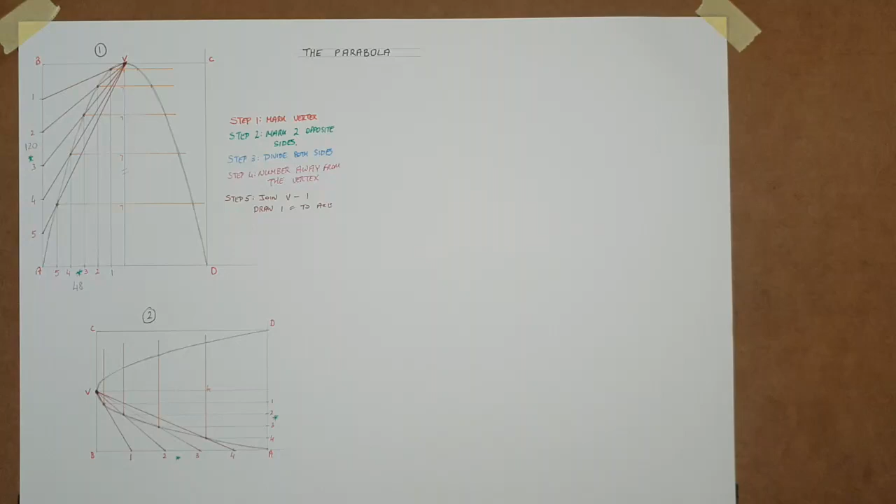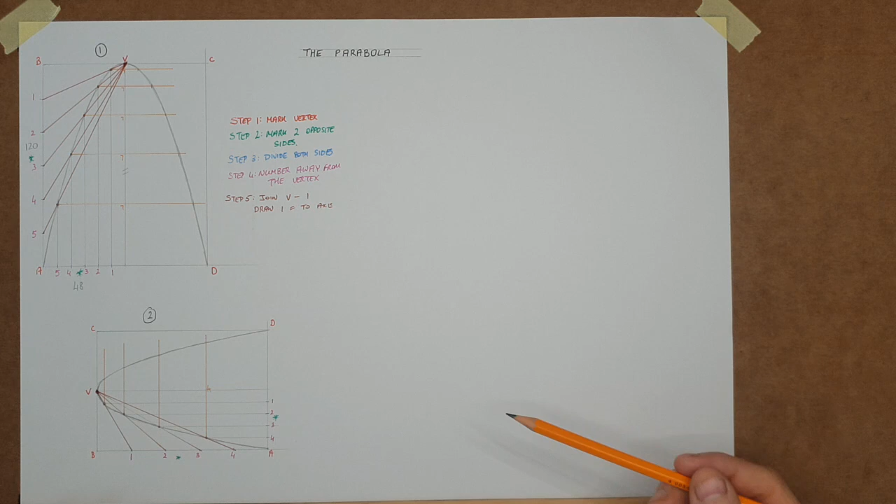Hi everyone, in this video we're just going to take the parabola on to the next step, I suppose a little step up in difficulty. We're going to draw something just similar to the last time. We're going to go horizontal. We're going to make it just a different type, so like a satellite dish facing up in the air.

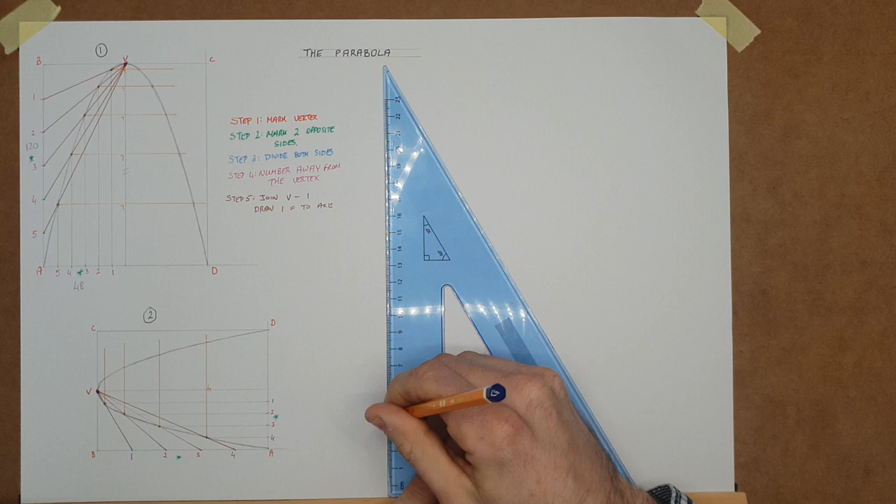I'm going to start off with a box 91 millimeters long. And just go vertical from my 2 points, and I'm going to make it about 43 millimeters tall. And there we are. Now this time I'm just drawing in half.

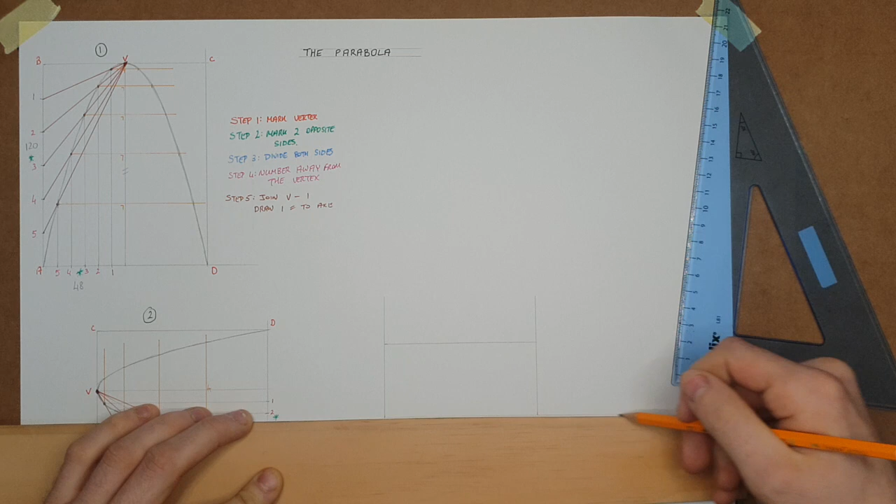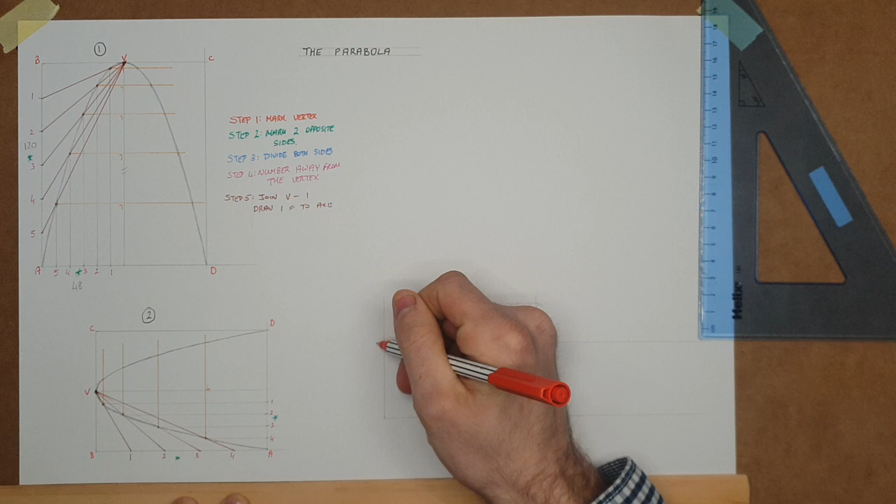The other half of the parabola would be on over this side, and you can add that after in your own time. So the other half would be over here, again 91 mil over. I'm going to label it this time A, B and C, but this point is the vertex in this curve. So we're looking for a parabola from A that goes down and hits the vertex, and it can be mirrored across then onto the other side after.

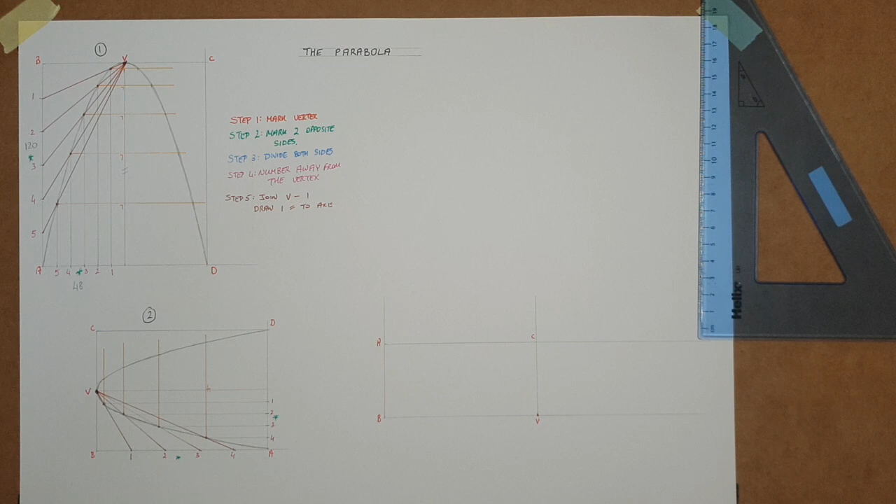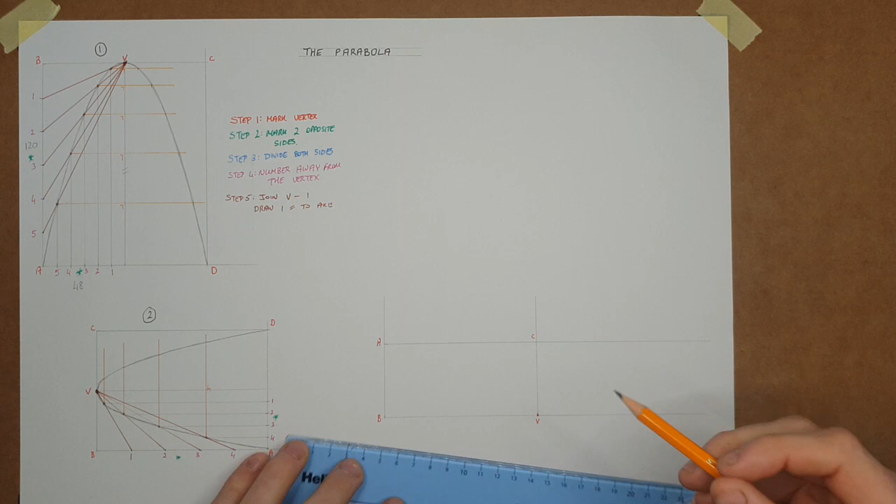What we'll find this time is that using just what I had previously said, the first one, 4, 5 or 6 divisions, the maths isn't really going to work out for us. So I'm not going to get into getting a calculator out and dividing this up 5 times into 91. It's not going to be very accurate. So what we'll do instead, we're going to bring back a little construction that would have been learned at a very early stage in technical graphics and graphics, and we're going to divide up this side into 5 equal parts, starting from B or V, it doesn't really matter.

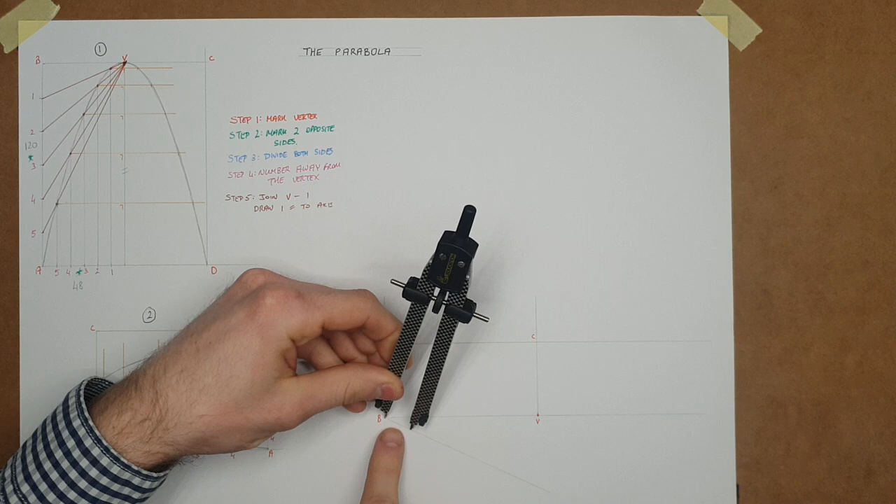I'm going to start from point B. I'm going to draw a random line, random angle. I'm going to get my compass, and I'm going to set any size at all in that compass, and I'll just kind of keep an eye. I want 5 strikes of this size to be able to fit on the line without going off the page. So 1, 2, 3, 4 and 5. So random line at a random angle and 5 random distances, but all equal, stepped out along.

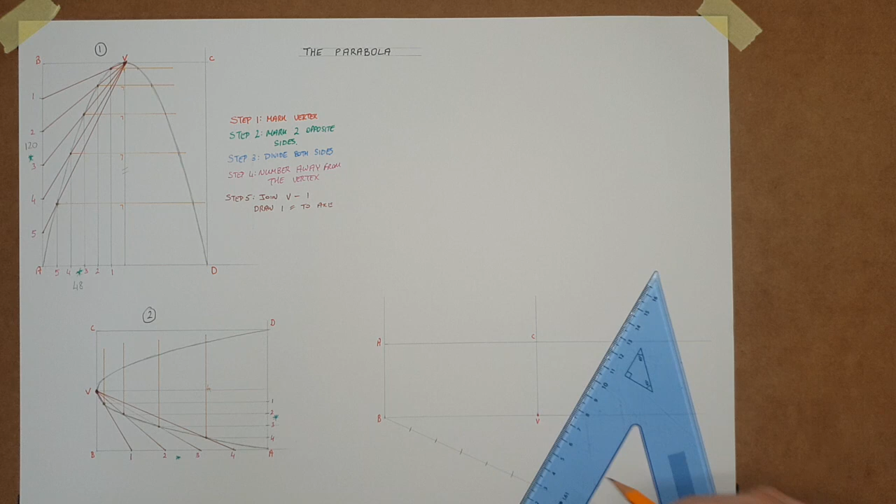I'm going to get my sliding set squares, and I'm going to join the final point to the end of the line that I want to divide. So it's equal divisions of a line here. I'm going to take my sliding set squares and I'm going to work up along for all my other points.

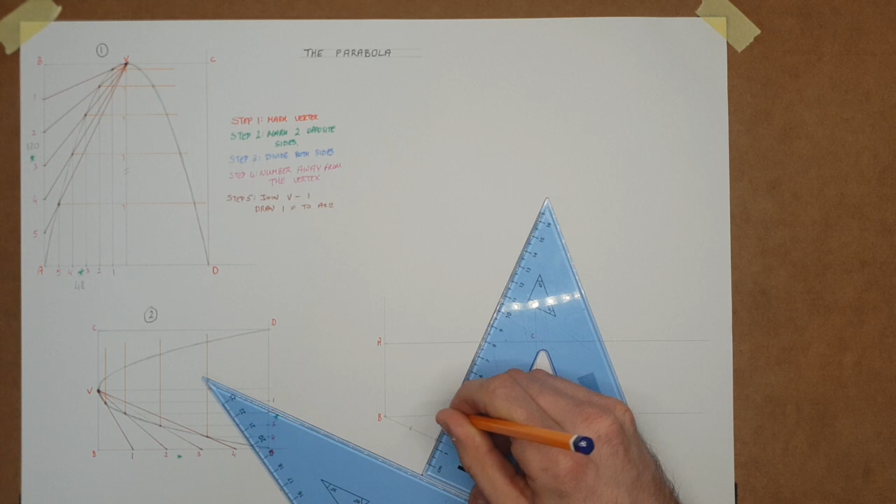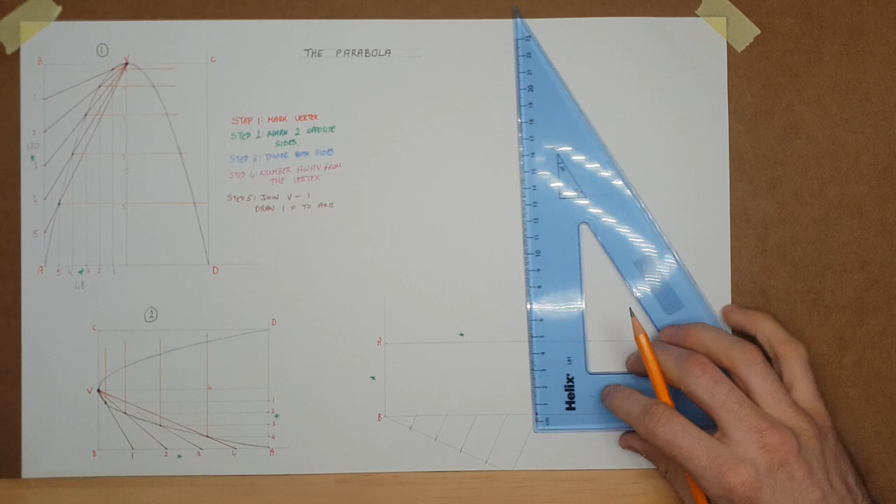Now, of course, going back to the original, so mark the vertex, mark the 2 opposite sides. So the 2 opposite sides of the vertex, if I'm working in this rectangle, would be this one up here and this one over here. So I probably should have maybe done my divisions up at the top, or it's no problem, we can just say, right, we're dividing the 2 opposite sides. I'll take the division and I'll mark it. I'll take my division here and I'll mark it, and do this for all 4.

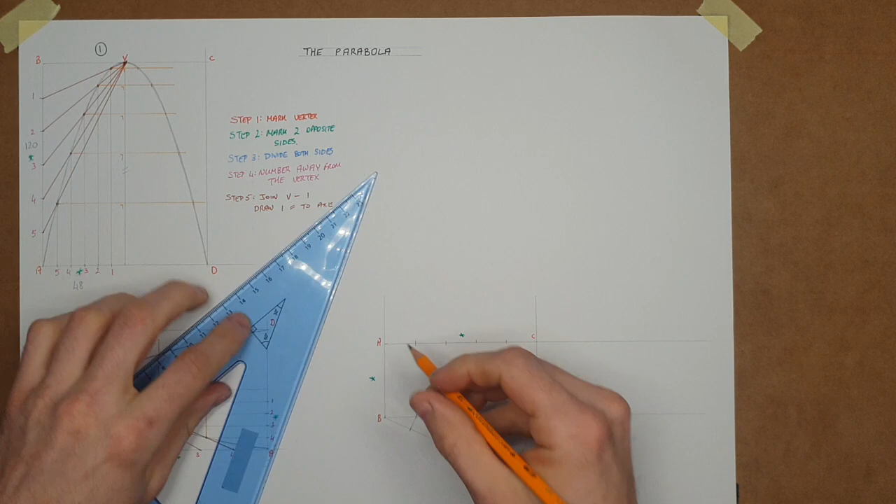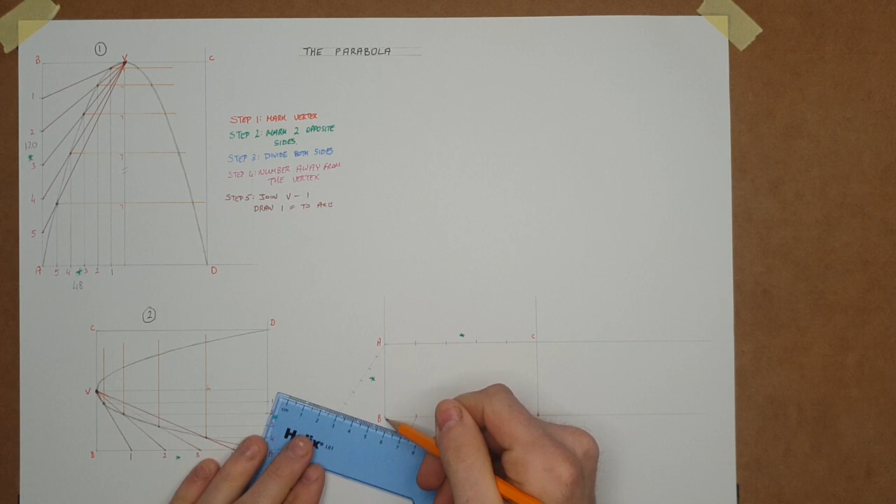So there's my 5 equal divisions along the opposite side, and I need 5 equal divisions along this side. So again, random line, there's a random angle, and 5 strikes of my compass along that line at any size that you like. 3, 4 and 5. Bring in my sliding set squares again and join the final point to the end of the line I'm dividing, and slide up along to all remaining points.

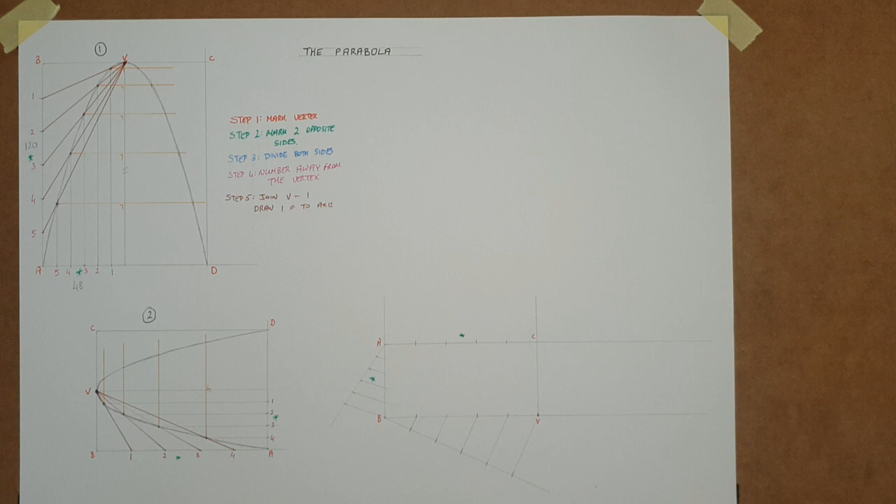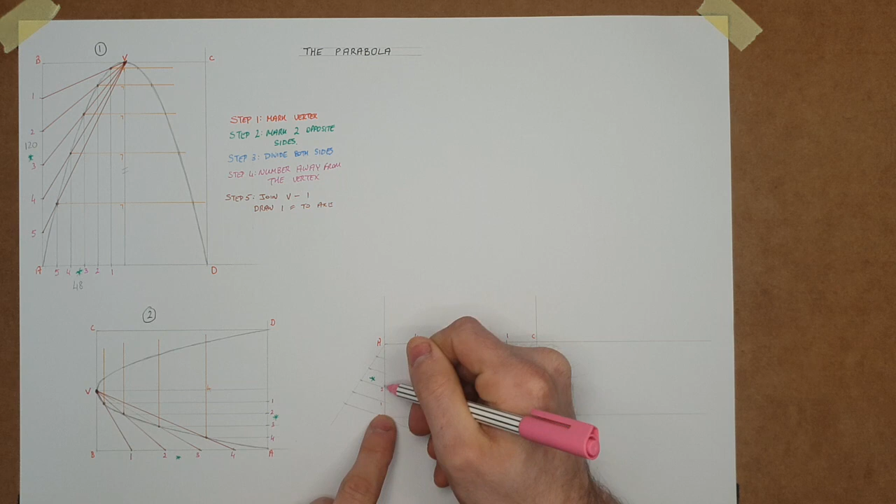So there's my 2 lines, my 2 sides of the rectangle divided up, which was step 3. Step 4 is number away from the vertex. So starting at the vertex now, just because my construction is down here, I won't make the mistake. I'm going to go up and start to number 1. So starting at the vertex, go up to the marked side and go across to number 1, 2, 3 and 4. Starting at the vertex and up. 1, 2, 3 and 4.

Now, that is step 4. Step 5 is join the vertex to point 1 and take the other point 1 parallel to the axis. So, what kind of curve? As I said at the start, it's a curve that starts at A and goes down to V. It's not the one that goes up from V, it's the one that comes across. So I'm going to point it towards point 1, which will direct my curve.

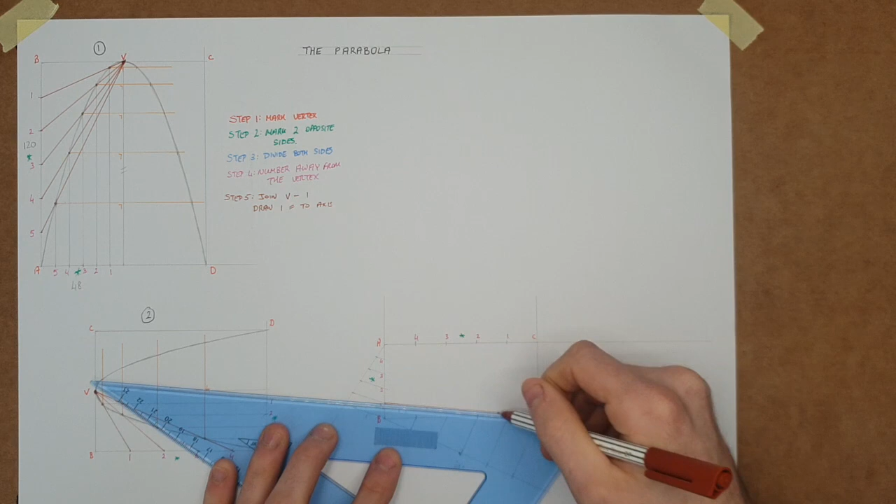So from the vertex to point 1 and parallel to the axis. We'll repeat that step for the remaining 3 points.

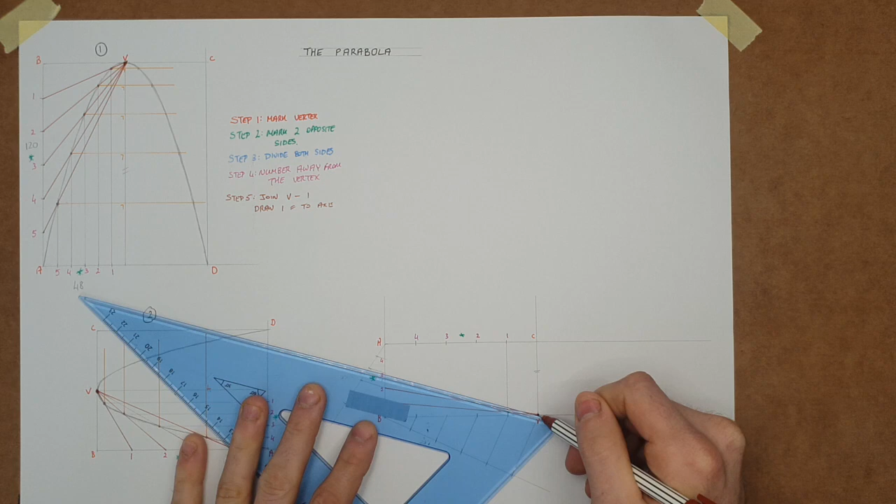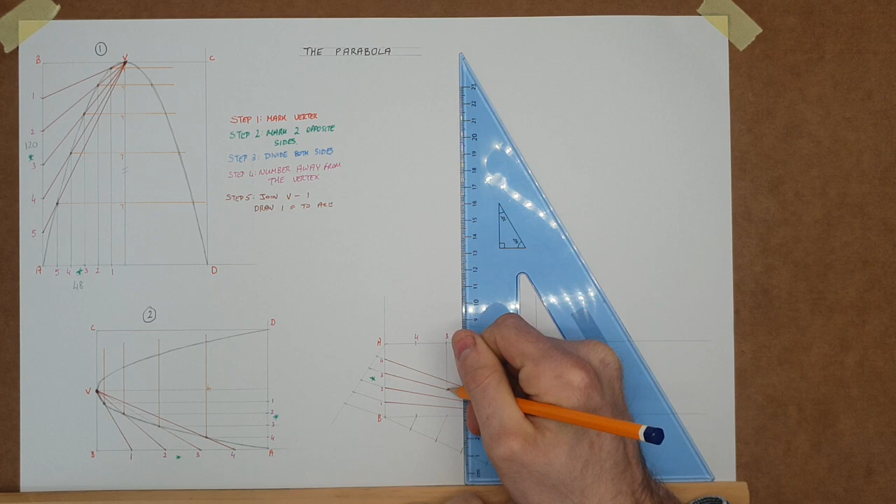And parallel to the axis from the remaining 3 points at the top. So point 2 hits line 2. Point 3 hits line 3. And point 4 onto line 4. And we freehand in the curve, starting at A, hitting all of our points along, and finishing up at the vertex.

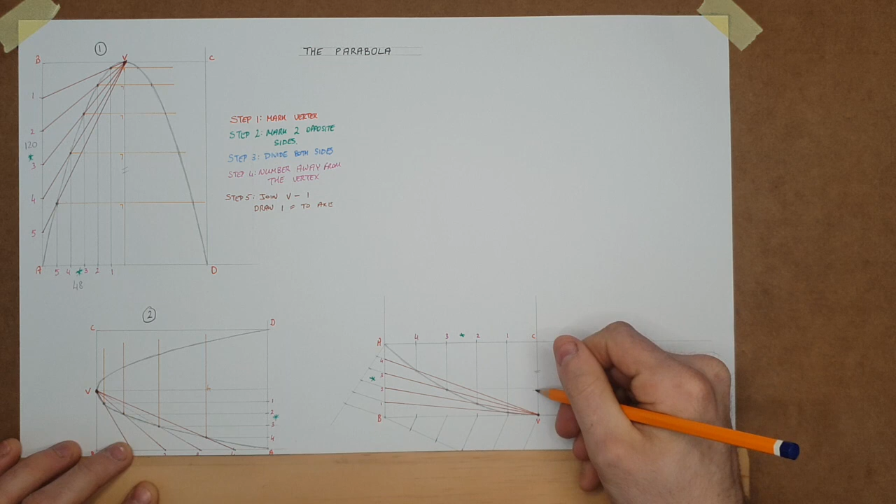I'm not going to go through this, but mirroring across this time, same as every other time. Take a point through the axis at 90 degrees to the axis, mirror it across with your compass, but don't forget as well, through the axis, mirror point A across with your compass, and that will give you the remaining half of the curve.

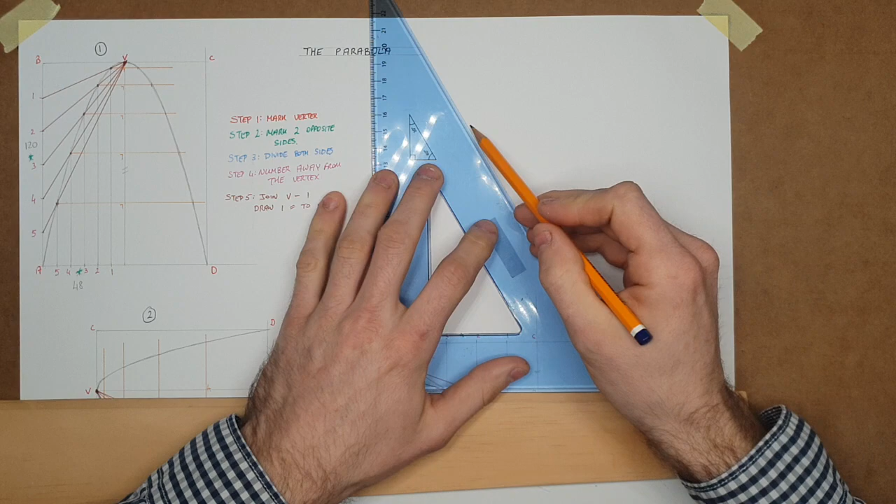The final parabola I'm going to go through is just at an angle, so I'm going to start off up here, and this time I'm not going to use any particular measurements at all. I'm going to go with a completely random line to start at 60 degrees. I'm going to go off with my 30 degree, and I'm just going to go with the end of this right here, so completely random size rectangle to start this drawing.

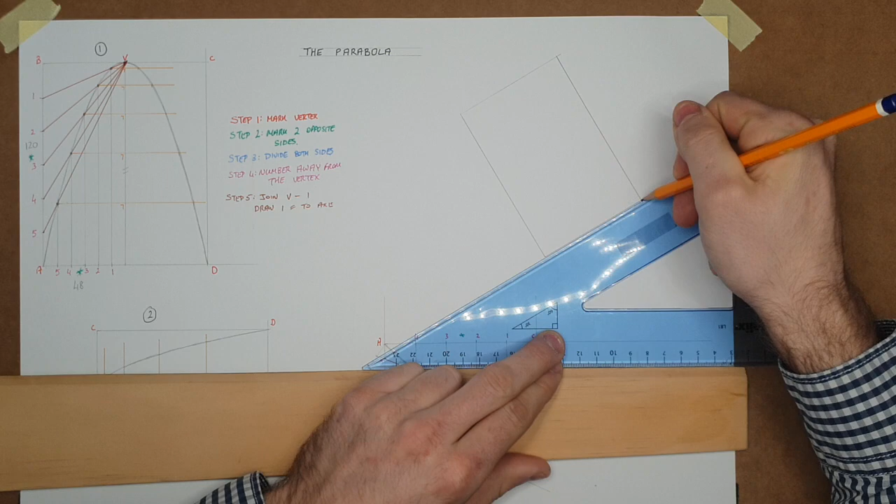Now, the type of parabola we're going to, I'll just label everything first. I'm going to have a parabola that goes from point A. I want this to hit a vertex here somewhere in the center of BC, so it goes up and it comes back down and finishes here at point D. So this is our final type of parabola we're going to draw for now.

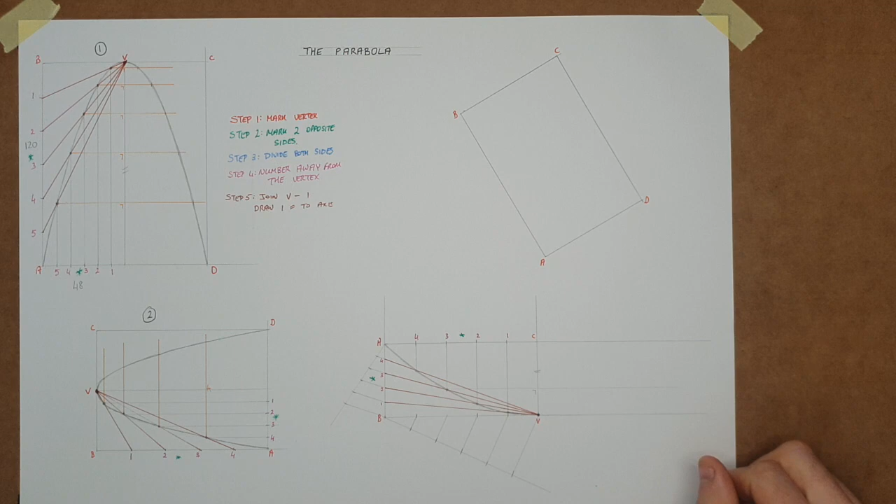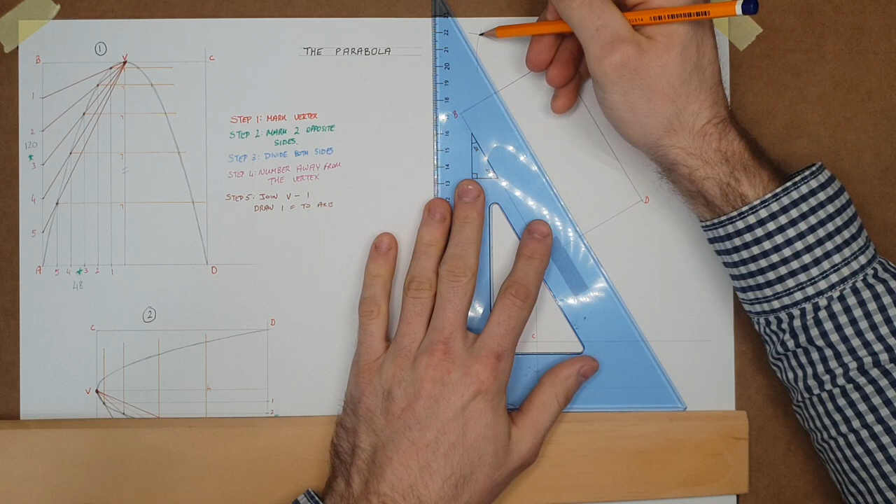What I want first is I want the center of the side. Now, I just completely guessed this base line. I don't know what size it is, so I'm not going to try and measure. I'm just going to take my compass and bisect the line. Now, because this is orientated at 60 degrees, I don't need to bisect above and below the line, because I know that the main axis going through is parallel to the 2 main sides. So if I just bisect in one position only, I can bring it down and I can draw my axis.

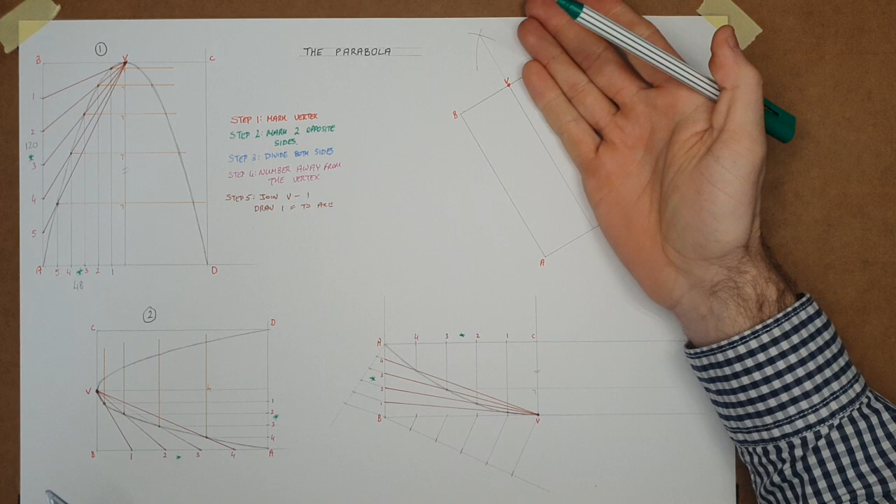Once I have my axis, I have a vertex. So that's step 1 done, mark the vertex. This time around, I suppose we'll just work with the one here on the left. I have quite a bit of space here. I'm going to disregard the right hand side and just work on the left hand side only. So step 2 was mark the 2 opposite sides. So I have an adjacent side, and I have my opposite side here, and I have my opposite side here.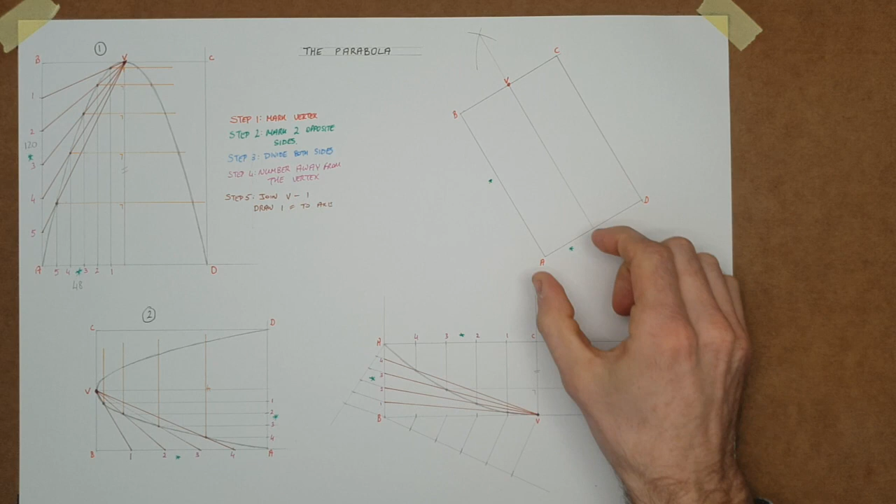Step 3 is to divide up both sides. Now, unless I was very lucky, I'm sure that the maths won't work out and that we won't be able to divide evenly 4, 5 or 6 times. So I'm not even going to check the measurements. I'm just going to start up and say, right, I want to divide this side into 5 equal spaces. So it's a completely random line.

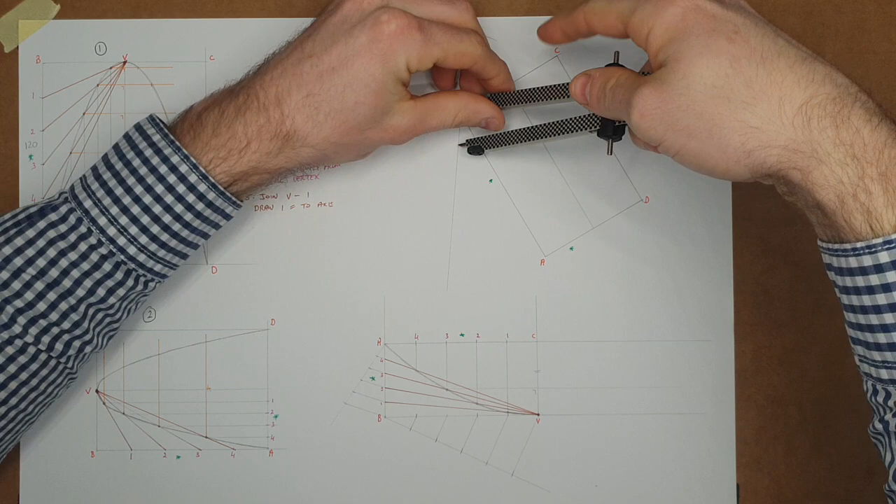Bring in your compass and set whatever you feel will work. Don't set it too small. If you set it too small, all your parallel lines are going to be really close and you might lose some accuracy. I think mine is set to, in this case, maybe around 20 millimetres, something like that. But there's my 5 equal spaces.

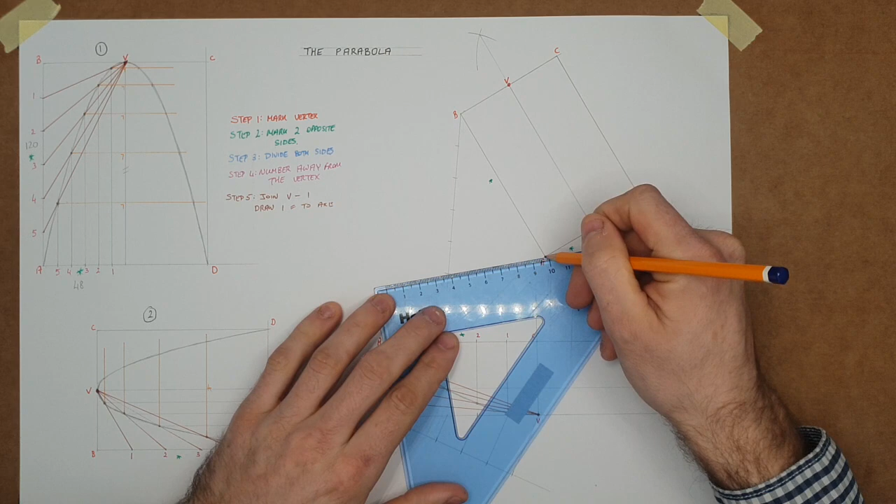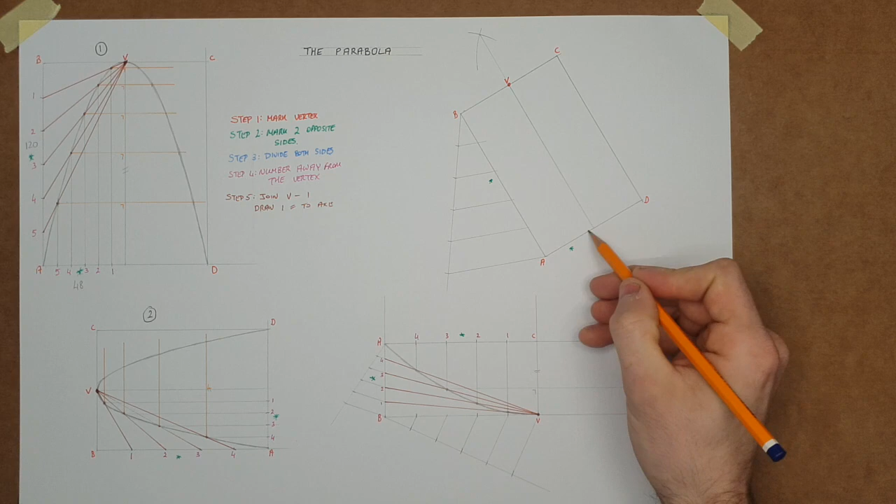And just like before, we'll join the 5th space to the end of the line that we're dividing. And we'll bring in our sliding set squares. There we have one side divided equally. So 1, 2, 3, 4, 5 equal spaces on one side, and I want 5 equal spaces on the other as well. So let's go with the same process. Bring in my compass.

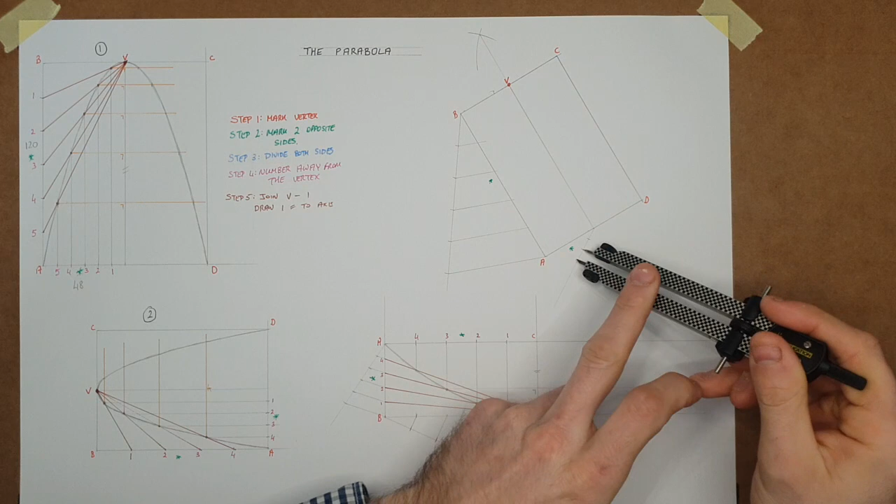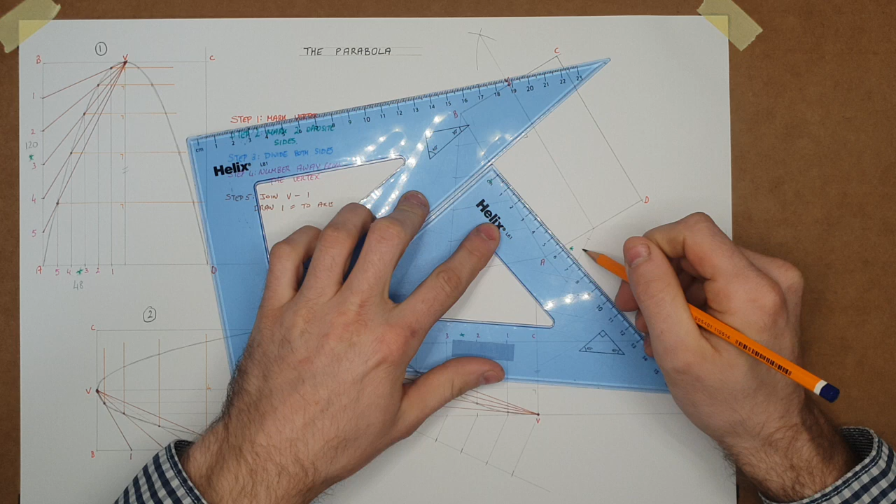There's my 5 equal spaces, and the final step, your sliding set squares, 5th space to the end of the line. So that's step 3 done. Divide up both sides. Step 4 is number away from the vertex again. So starting at the vertex, coming across and coming down to number 1, 2, 3, 4. Starting at the vertex, I'm coming across to point 1, 2, 3 and 4.

And step 5 is to join the vertex to the point. So basically our construction starts now. The type of curve I want goes from the vertex. It doesn't go down towards this point 1. It goes across towards this point 1 and then down. So join and direct the curve with your first line.

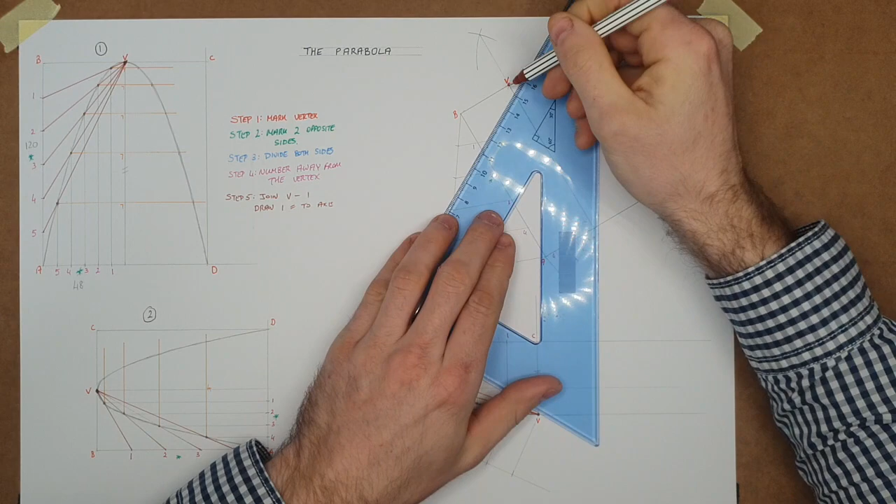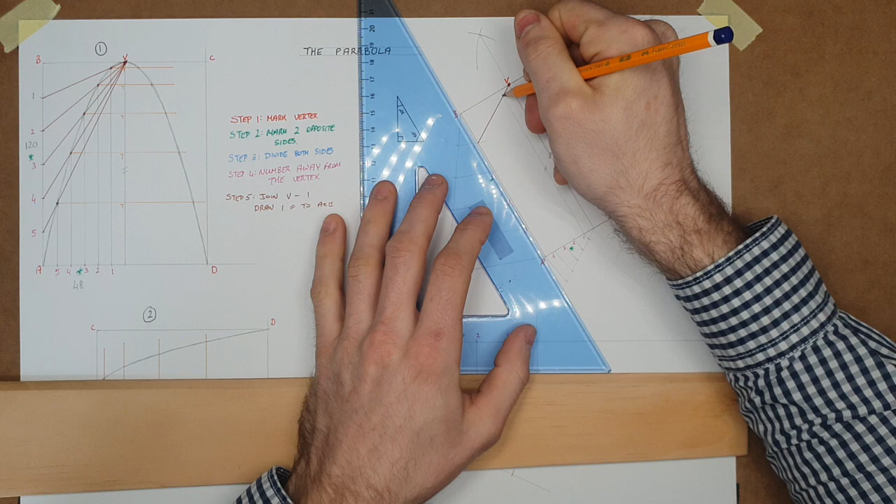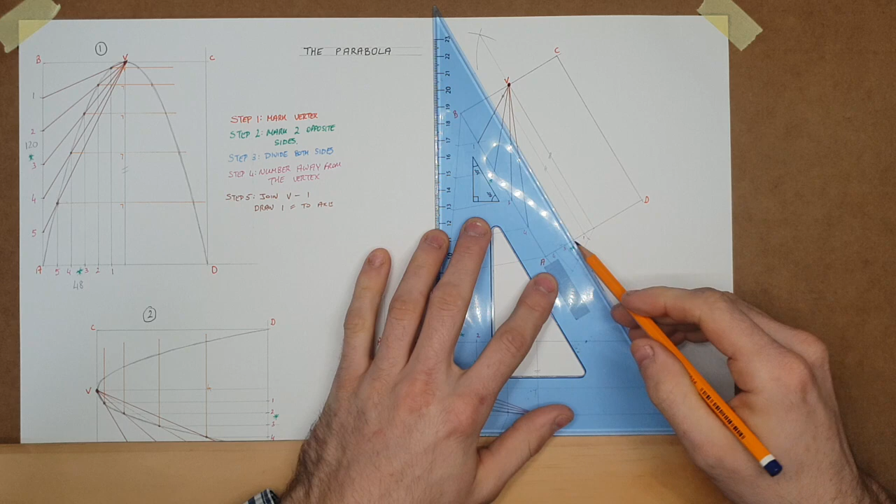Direct the curve with the first line, and just like our rule, parallel to the axis from the other point. So from point 1, parallel to the axis. Now in this case the axis is 60 degrees, so we're parallel to it, and that gives us a point in the curve. I'm going to just repeat that step then for all remaining points. And parallel to the axis from all remaining points here on this baseline. Finally, for this half, we freehand it in.

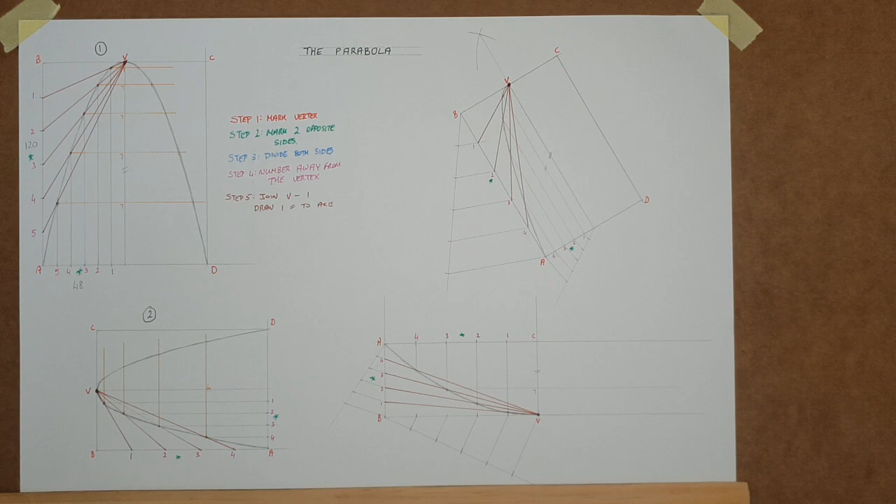Last job, we will mirror it across this time. So there's our path for one half. We want to mirror it across to the other half. Now, like my rule for every other one of these drawings, we want to mirror at 90 degrees to the axis through all of the points that we have just found. So at 90 degrees to this axis here.

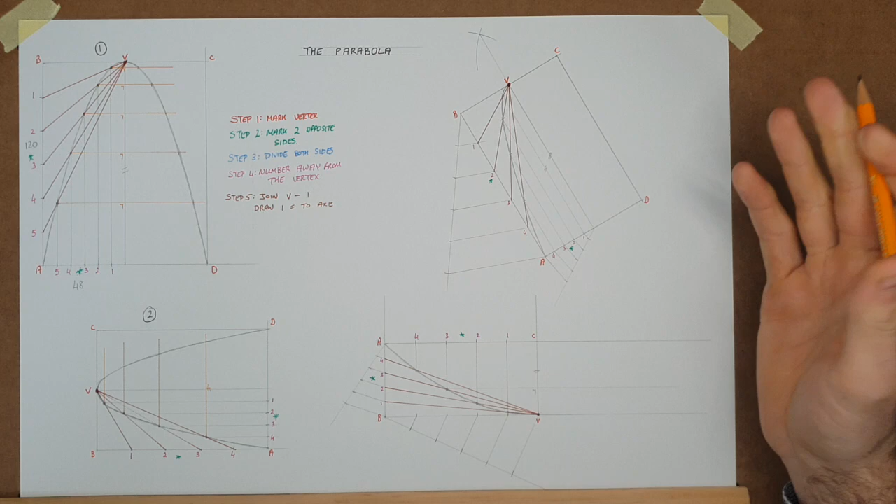Now if this wasn't at a set angle of 60 degrees, we'd have to use sliding set squares or an adjustable set square. But because it is a 60 degree axis, well, a 30 degree projection will give us perpendicular. So using the same colour just for consistency here, through the axis at 90 degrees to the axis, just like every other time.

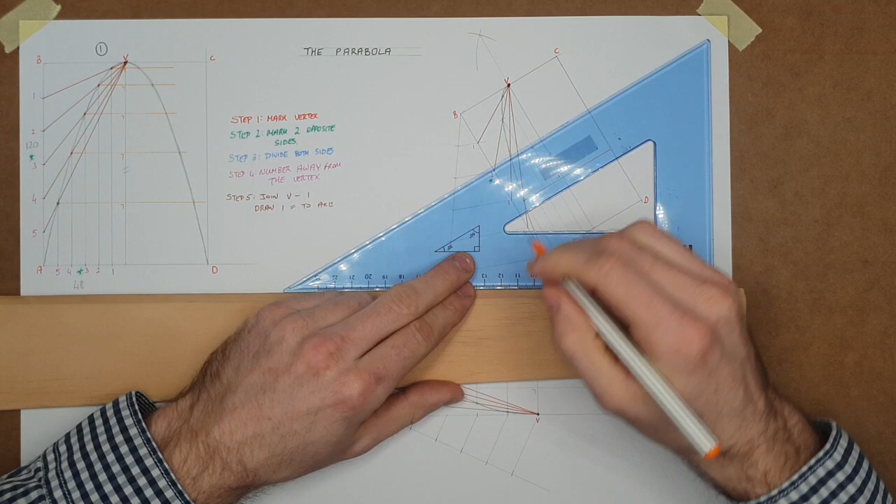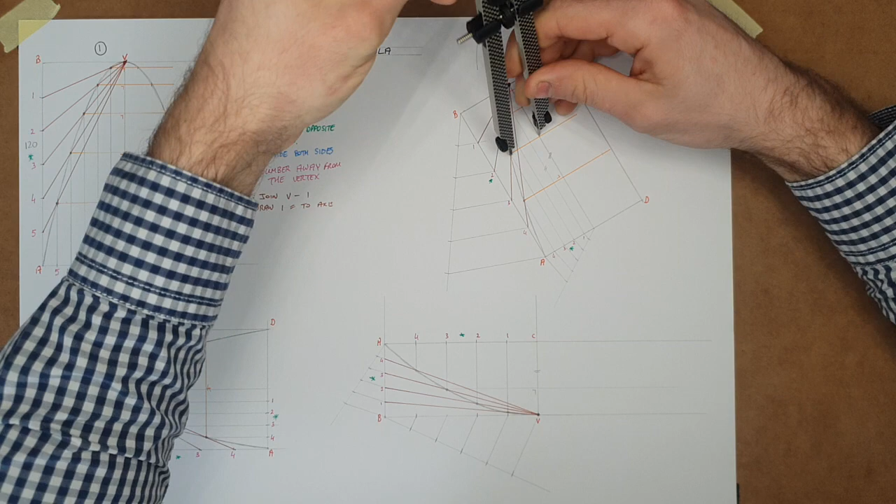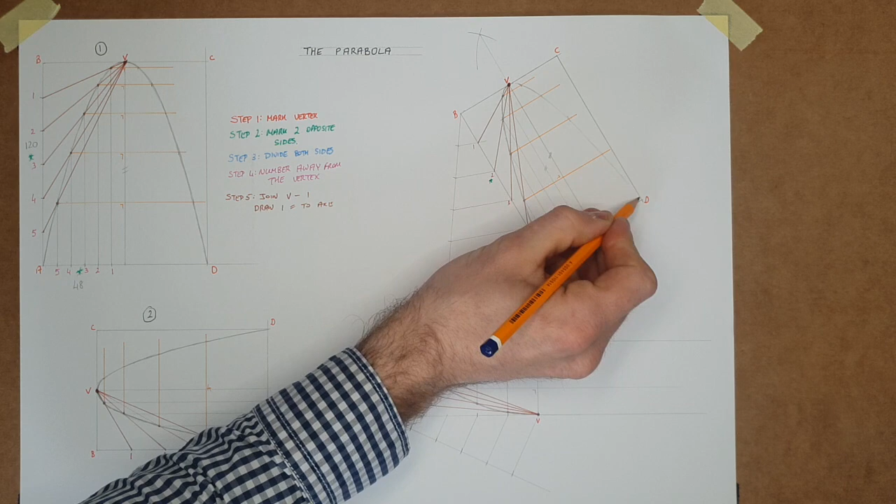Again, just like every other time, we'll bring in the compass. We'll lay the compass on the axis. We'll open it out to one side where we have a point, and then we'll find it on the second side. So there's all of our points on the second half. The final task is freehanding the curve. So there we have our third and fourth parabola.

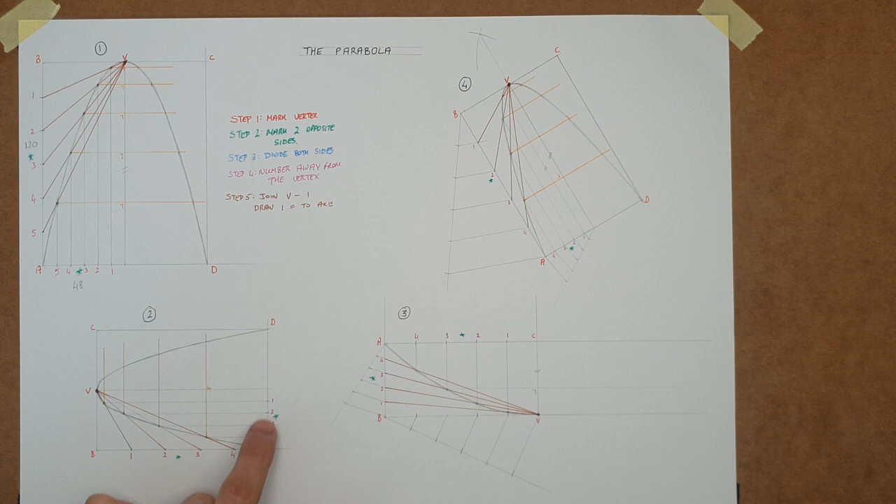So starting off at the beginning, we had some very regular measurements to deal with, our 120 and our 48, where 6 divides into both in a vertical orientation. We then had 5 dividing into both with a 100 and a 35. Then we had numbers that were given that just didn't happen to work out. The maths didn't work out for us, so we had to bring in our equal division of a line that we'd have learned back in first year.

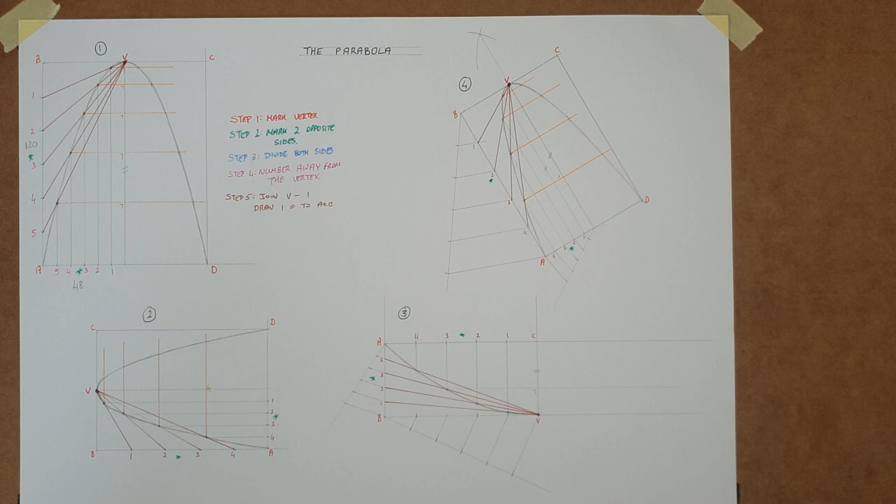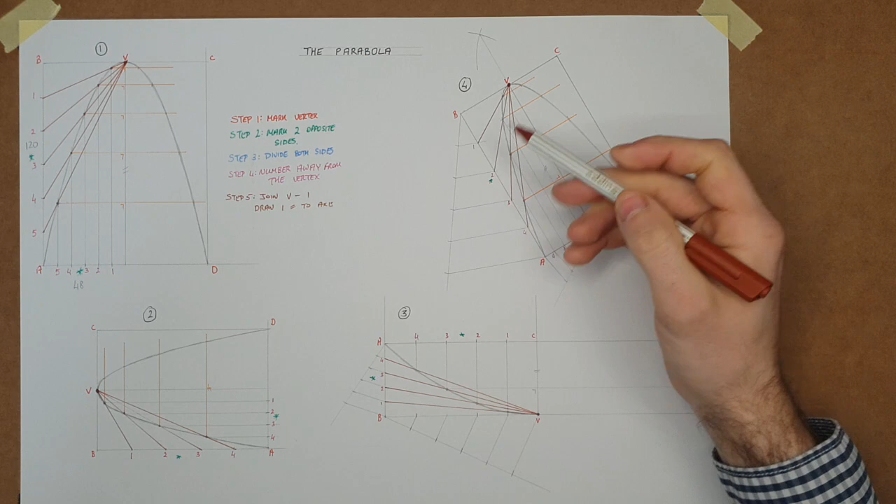And finally, onto a parabola that's at a given angle. So this time it was 60 degrees, but regardless of what angle, even if it's set up on a page at a completely random angle, the only time that we'll have to really think about it is going parallel to the axis, where you could use sliding set squares, and going perpendicular to the axis, again sliding set squares. But this time again, with our random sizes, maths wasn't going to work out for us, so equal division of a line applied here, and once we've all of our points found and numbered, we'll just keep applying the same 5 steps for each of these.

I hope these videos were useful. This should really help with getting onto some of the questions out of the book, or maybe even onto some previous exam questions. Thanks very much.